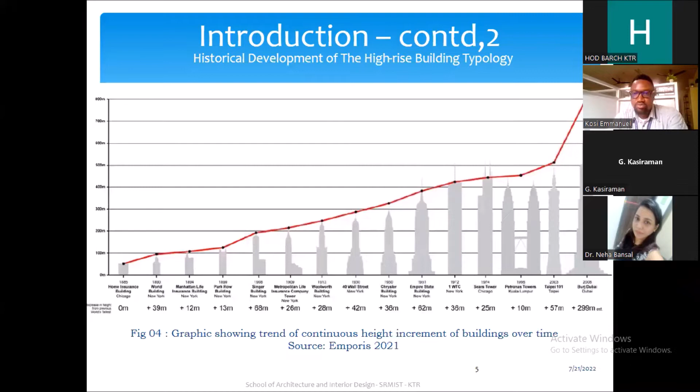This chart or graph shows high-rise buildings starting from 1885, the Home Insurance Building in Chicago, and traces the increase in height of high-rise buildings over the years. I've mentioned the names of the buildings and their heights, tracing this progress from the Home Insurance Building in Chicago up to the Burj Khalifa in Dubai.

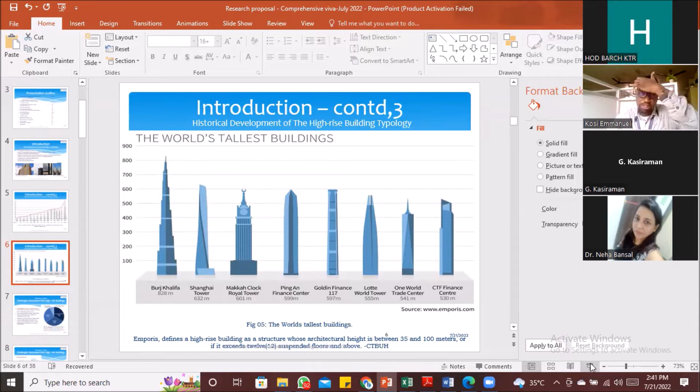So that's also what we're trying to show here. One important thing at this point is to identify the definition of a high-rise building by CTBUH, the World Authority on High-Rise Buildings, the Council on Tall Buildings and Urban Habitat. They have defined a high-rise building as a structure whose architectural height is between 35 and 100 meters, or if it exceeds 12 suspended floors, it can be regarded as a high-rise building.

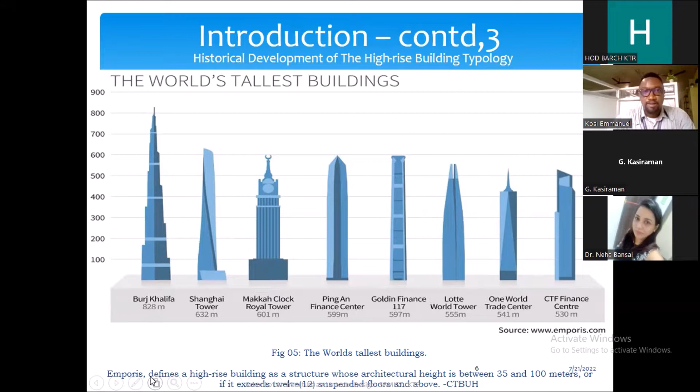So now I've mentioned the history of high-rise buildings and talked about the benefits. Now I'm also trying to highlight the challenges associated with this building typology.

With increase in height, tall buildings become more resource intensive due to the excessive scale and complexity required to achieve them. Heavy energy and heat supply is required. You also have to worry about unstable wind pressures, and rely on technology to fight fire at such altitudes.

Also, the problem of vertical transportation: you have to make sure you have steady power supply, otherwise you cannot travel to upper floors without lifts. If there is no power, the lifts won't work, and if the lifts don't work, you have a building which is non-functional. This also goes for water supply—pumping water from ground level to higher levels needs a lot of energy and specialized technology.

Again, it requires highly skilled consultants and contractors to design and build, because any wrong design strategy can lead to increased energy consumption.

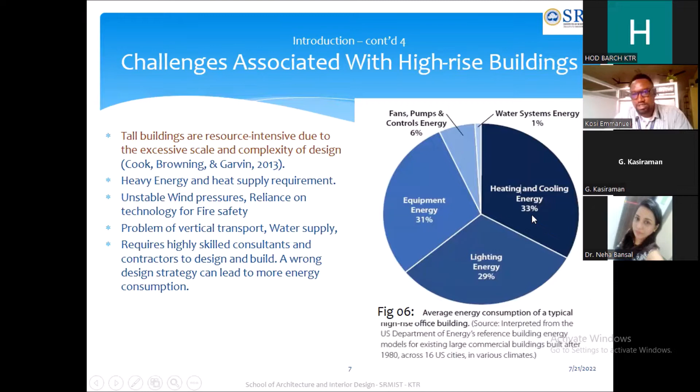I've included this pie chart interpreted from the United States Department of Energy reference building, identifying in percentages the different aspects of energy consumed in high-rise buildings. We can see that the highest energy-consuming feature is heating and cooling energy, at 33%. This points to the fact that heating and cooling, which we also call HVAC, is a critical area for high-rise buildings, and one of the challenges these buildings currently face.

This report by the United Nations, in a more global sense, highlights that buildings generally—whether high-rise, low-rise, or medium-rise—consume 36% of natural resources and energy. This means the construction and operation of buildings consume 36% of world energy consumption and generate 39% of the world's greenhouse gas footprint.

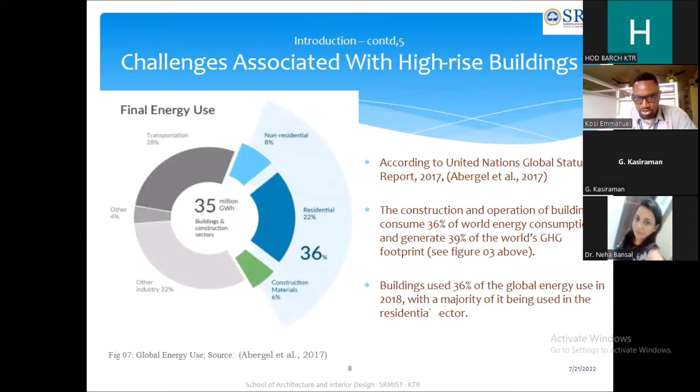We cannot neglect this, because it's important to identify why these buildings consume so much energy. Of course, lots of researchers have worked on this, and there's a move towards reducing the energy consumed by buildings, especially high-rise buildings.

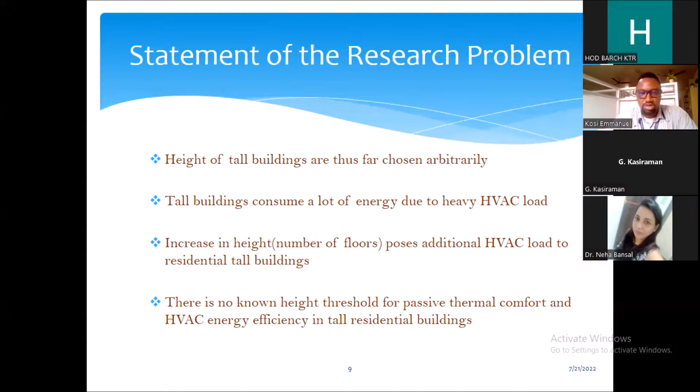In this slide, I state the research problem that this whole topic is trying to address, put as bullet points: the height of tall buildings thus far chosen arbitrarily; tall buildings consume a lot of energy, especially due to HVAC load; the increase in height and number of floors poses additional HVAC load, especially in residential tall buildings; and there is currently no height threshold for passive thermal comfort and HVAC energy efficiency in residential buildings.

So we went into a review of published literature, and a number of researchers have done extensive work in the area of energy efficiency, thermal comfort, and high-rise buildings.

This particular study by the Council on Tall Buildings and Urban Habitat - I'm referring to the picture on the left with red arrows pointing at item number 2. They conducted a study and identified major topics of importance regarding high-rise buildings. The second item on their list was the need to research and determine the optimum height, density, and massing of tall buildings in order to provide appropriate social interaction and communities at an urban city scale. This work by the CTBUH identified this as a gap which needs to be studied and researched.

To the right, you can find that researchers at University College London in 2017 also did some work where they took high-rise buildings and analyzed the energy consumption. The high-rise buildings they took, by the way, were commercial office high-rise buildings. They came up with the conclusion that beyond a certain height, buildings begin to become energy inefficient - it's not efficient to build beyond that height.

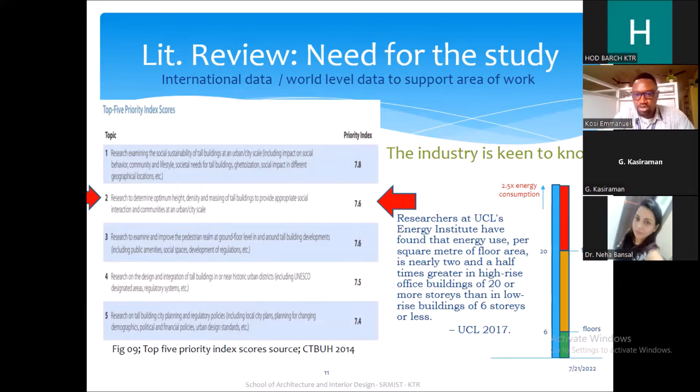Now we go forward to look at the definition of the key concepts we are talking about, which include energy efficiency, thermal comfort, and building height. Simply put, energy efficiency means using less energy to get the same job done, and in the process cutting energy bills and reducing pollution. In this case, we are focusing on energy consumed specifically by heating, ventilation, and air conditioning.

So we're talking about thermal comfort. Thermal comfort is defined as the condition of human mind that expresses satisfaction with the thermal environment and is assessed by subjective evaluation. Building height refers to the vertical distance from the grade level at the main entrance to the top of the parapet that comprises the majority of the building for a flat roof. So basically what we are looking at is three things: energy consumed by HVAC, and the thermal comfort of the individuals who are in these buildings at different altitudes.

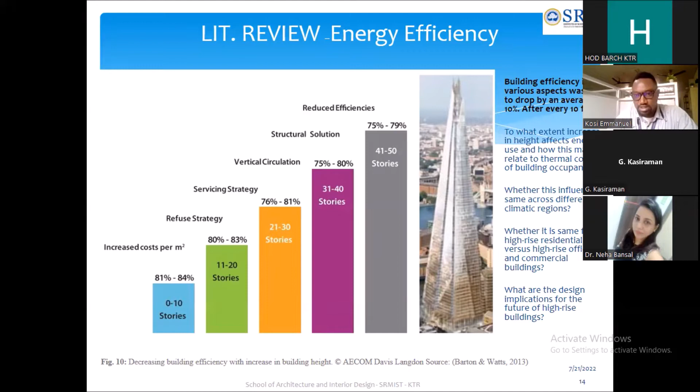Moving on to the next part, where I highlighted the work by the popular patron of bioclimatic design concepts, Ken Yeang. The principle of bioclimatism simply means design aiming at the construction of buildings that are in harmony with the natural surroundings and the local climate, ensuring satisfactory conditions of thermal comfort inside. Ken Yeang, over the course of his practice and academic pursuit, has written lots of books and articles on this principle, and has done many real-life built tall buildings where he tried out this concept.

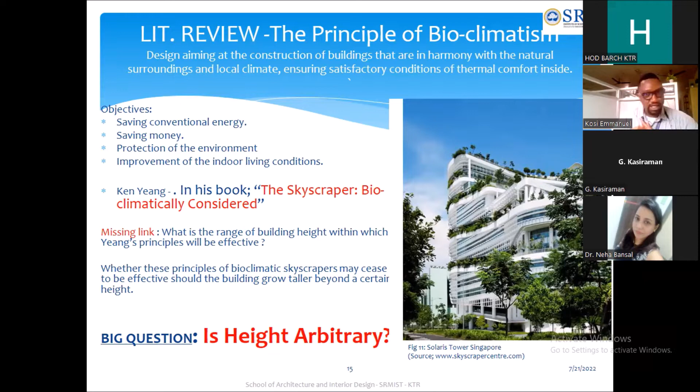This immediately raises another question: if it is possible to design high-rise buildings to adopt the bioclimatic concept, is this true at any height at all? Or at some height does it become impossible to have a bioclimatic skyscraper? This is a missing link identified from this particular study.

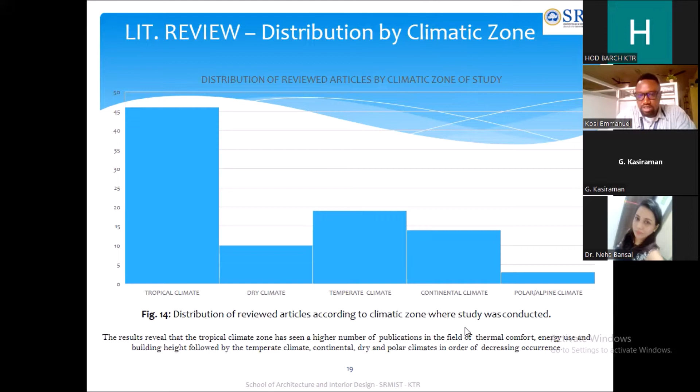I also made this chart to show the distribution of articles studied according to the climatic zone where the tall buildings studied were situated. We find that tropical climate has seen the most studies in this regard. The results reveal that tropical climate has seen a higher number of publications in the field of thermal comfort, energy use, and building height, followed by temperate climate and continental dry climate, as we can see, making it easy to understand what is going on in research in this area.

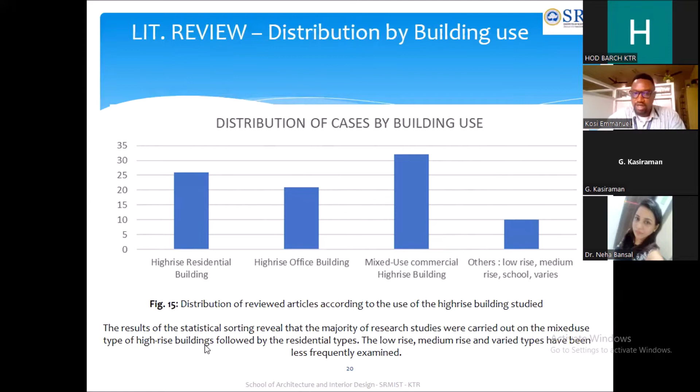We also prepared this distribution by type of use. I mentioned earlier that it's important to know whether the influence of height differs for residential, commercial, and office buildings. From the articles reviewed, the results of the statistical study revealed that majority of research studies were carried out on mixed-use type high-rise buildings. This is also important for us to know what other researchers are doing in this field.

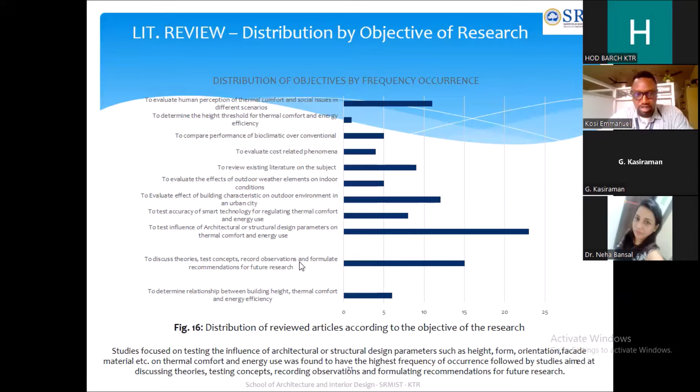This shows the distribution according to the objective of the research, why those authors carried out their studies. Studies focused on testing the influence of architectural or structural design parameters such as height, form, orientation, facade material, etc. on thermal comfort and energy use were found to have the highest frequency of occurrence, as we can see from this chart. More work had been done in the area where the objective was to test the influence of architectural design parameters, including height, on energy and thermal comfort of high-rise buildings.

In summary, we identified some gaps in the literature study: there is no definite height threshold for energy efficiency in residential high-rise buildings; there is no knowledge on the nature of the influence of height on thermal comfort in high-rise residential buildings; there is no knowledge on the comparison of HVAC energy performance between residential and commercial high-rise buildings, meaning we don't know whether residential high-rise buildings consume more HVAC load than commercial ones; there is paucity of research on tall buildings from Africa; and finally, there's no knowledge on the relationship between building use and thermal comfort.

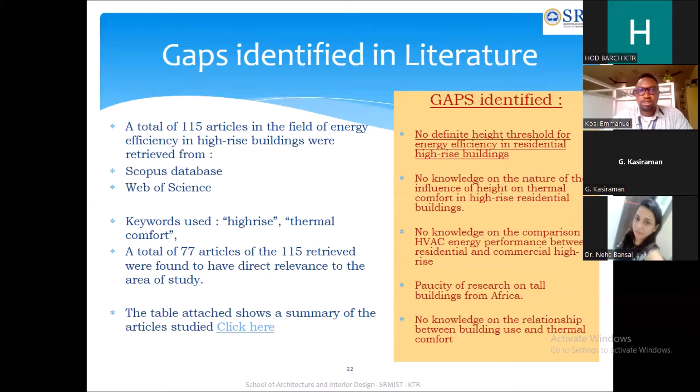This brought us to the aim and objective of this study, which is to evaluate the relationship between three elements: building height, passive thermal comfort, and HVAC energy consumption, specifically for residential high-rise buildings. This is with a view to ascertain, in empirical terms, the optimal height or optimal height threshold for HVAC energy efficiency and passive thermal comfort in high-rise buildings.

So what this means is that we're trying to study three variables: building height, passive thermal comfort, and HVAC consumption, low energy consumption. We're trying to find if there is a relationship between these three, and if so, what is that relationship in empirical terms. That is the aim of this study.

The research questions that this study will answer, when completed, we identified four main research questions. The first: we want to find out if there is a significant relationship between the building height, meaning the altitude, the floor level, and the energy consumed by HVAC equipment in residential high-rise buildings. We want to find out if there is any relationship at all.

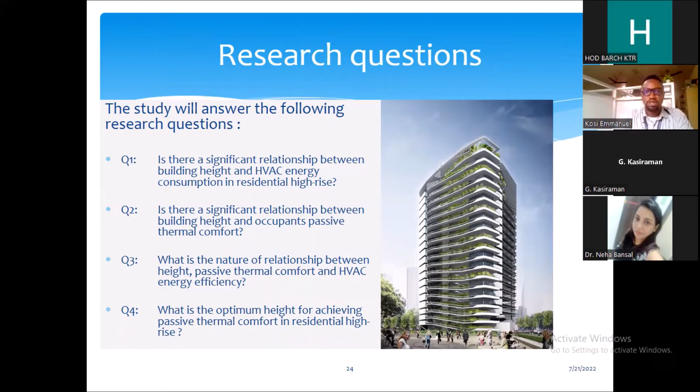Thirdly, we want to know what is the nature of this relationship, if it exists. Fourthly, once we answer these three questions, we will be able to find out if there is a range of floor levels within which it is optimal to maintain low energy consumption and passive thermal comfort. So these are the questions which this research intends to answer.

To answer that, using the alternative hypothesis method, we have come up with four intelligent guesses which will be subjected to testing, adoption, or rejection. For the first question, we suggest there could be such a relationship. For the second, yes, there could also be such a relationship. For the third, we also think there is such a relationship between these three elements.

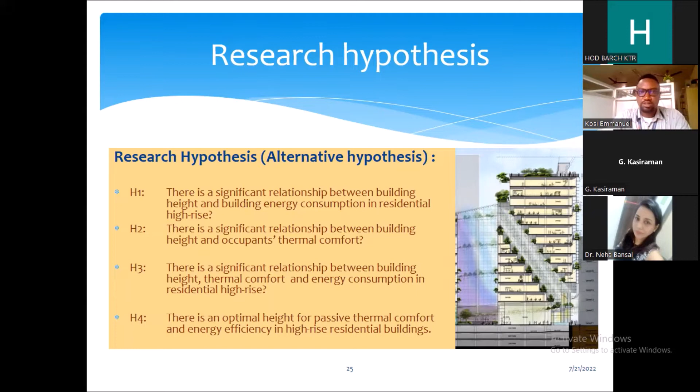For the fourth question, we guess that there must be an optimal height range within which, if you maintain that height rather than designing your building to any arbitrary height, you can achieve passive thermal comfort while using minimal energy consumption. So these are four intelligent guesses to answer the four questions, and they will be either accepted or rejected at the end of the study.

For the method we intend to use, it's basically fieldwork data collection. We're going to use a formula to arrive at the number of buildings we'll study, then visit those buildings and take measurements on ground for calculating thermal comfort.

As for the occupants' thermal sensation, how they think they feel in the buildings, we're going to issue a structured questionnaire to capture that. For reliability of the instruments used, we're going to use the test-retest method and Cronbach's alpha to establish the coefficient of reliability of their responses, ensuring they don't respond due to bias or due to some physiological or psychological imbalance at the moment.

As for the energy consumption due to HVAC, we're going to try to abstract that from the energy bill data, requesting it for different apartments at different levels. We'll use mathematics to abstract exactly what amount of consumed energy was due to the HVAC, air conditioners, and so on. Once we have this data in tables, we're going to simulate.

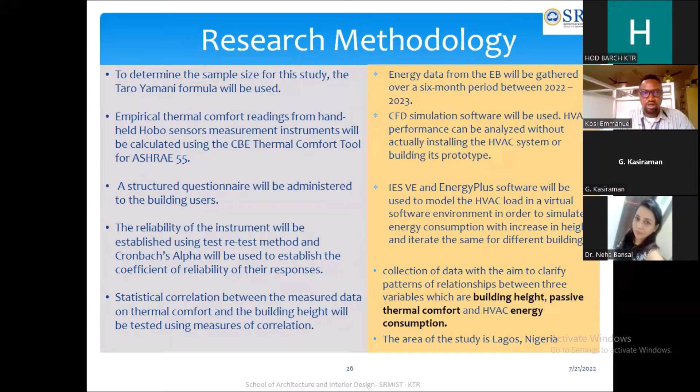So at the end of this, we are trying to collect data with the aim to clarify the patterns of relationship between the three variables: floor level, passive thermal comfort at different floor levels, and energy consumed by HVAC at different floor levels. The area identified for this study is Lagos, Nigeria, which is my home country.

As justification for the choice of research methodology, we mentioned that CFD and IES VE simulation is the industry standard for simulating HVAC performance in yet-to-be-built spaces. Many researchers have used CFD simulation, and there is a lot of work stating that this is the method they used and they arrived at reliable results.

As for why we are using EB, energy data collected by the Municipal Electricity Board is the most reliable because it's the government authority that issues, measures, calculates and collects energy bills. So whatever data they provide for this study at the different levels will be very reliable. That is why we have chosen them.

For the thermal comfort calculation, there is a wonderful tool developed by CBE, University of Berkeley. The screenshot shows an interface of the software. All you have to do is grab the real life measurements, and once you put it into this software, it gives you the thermal comfort at every level.

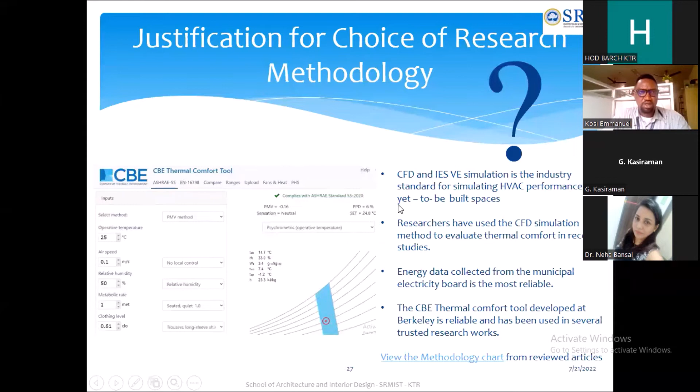As for the research process we're going to use, I mentioned that we're going to be doing a lot of field data collection, but before that we have to identify the instruments that will be used, which have been identified, and we have to test and validate them before we hit the field.

Once we are in the field, we grab the measurements and issue the structured questionnaire, and also get hold of whatever secondary data is available.

Once we come back from the field, we put this down in tabular format, and then we try to iterate using software to see what happens in cases where we go higher. We'll try to iterate the different values, present this in tabular format, and perform statistical analysis. Then we will be able to accept or reject the hypothesis.

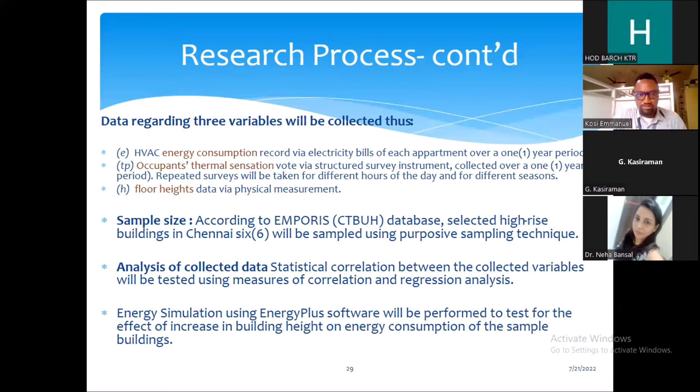This also mentions the three elements we are talking about, which include HVAC energy consumption, the occupants' thermal sensation vote, and the floor levels or floor heights. This is the list of experiments which will be performed.

We're going to use the Taro-Yamane formula to arrive at the sample size, and then use a structured questionnaire to grab the occupants' thermal sensation vote. Then we're going to use the Hobo sensor equipment, HD32.3 instrument, to grab the four parameters which make up thermal comfort: air temperature, relative humidity, air speed, and mean radiant temperature.

Once those are captured, we're going to use the CBE thermal comfort calculator developed in Berkeley to calculate and arrive at the thermal comfort for the different levels. We're also going to use CFD simulation and the Energy Plus software. Once that is done, to analyze the results and come up with significant relationships, correlations, or regressional analysis, we're going to employ the statistical package SPSS. Then to present our finished work, we're going to use Excel, PowerPoint, and Word.

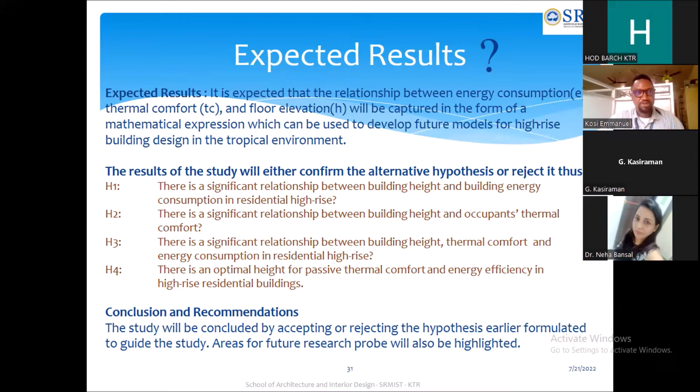At the end of this study, it is expected that we will find, one, whether there is any relationship at all within these three variables, and if so, whether it can be expressed in a mathematical formula. If so, it is expected that this relationship, once captured in mathematical form, can be applied for various uses, like future designers or architects determining whether they want to go to 100 floors or 200 floors. It will no longer be arbitrary; it will be guided by some mathematical expression between energy consumed due to HVAC, floor level, and thermal comfort. If such a relationship exists, we're going to find out.

As for research and publication ethics, we touched on what is acceptable and what is wrong when it comes to research and publication. As for the internal courses in the department, I took 4 courses, including facade technologies, green building strategies, performance evaluation tools, and new age materials and methods.

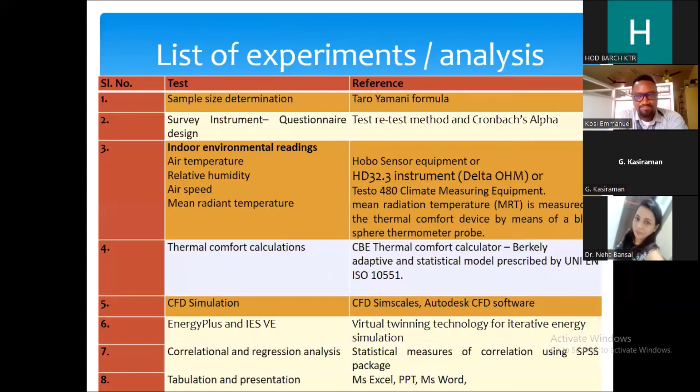Okay, Mr. Emmanuel. Yes, sir. I like your presentation, very systematic and well-organized. Thank you very much, sir. Within a year I think you've published 2 papers also, it's really a remarkable one. Thank you very much, sir.

Good work. So, in many of the literature they talk about building height, the relation between height and energy efficiency, passive design techniques, everything already they talk about. What is the novelty in your project? This was already discussed in many of the literature.

Hello? Yes sir, I'm with you. Your audio is a little wavy, I didn't get your question. Can you hear me now? Yes, I can hear you now, sir. Many of the literature already discussed height, energy efficiency, and passive design techniques. So are you only repeating, what is the novelty in that?

The novelty in this research proposal is that as of now, the academia does not know for sure what is the optimal height. As it stands, high-rise buildings are done arbitrarily — if you have more money you can go to 1,000 floors, if I have less money I can do only 10 floors. There is no known scientific range of height that is optimal for maintaining passive thermal comfort and low energy consumption. If this study finds that out, it will be very new and wonderful information, because it will guide future designers regarding height decisions.

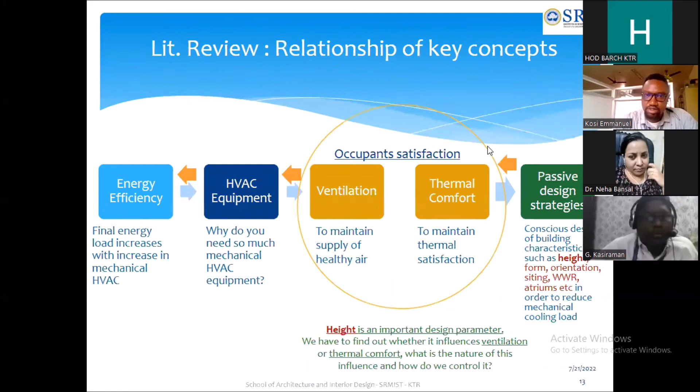Very nice. This one, the Journal of the International Society for Study of Vernacular Settlements, is Scopus Index since 2016. Is it unpaid or paid journal? It is paid, sir. It is paid.

Yes ma'am, audible? Yes ma'am. Okay, first of all I appreciate the amount of work you carried out within a year. And what I felt is your focus is missing, okay?

Like you started with the range of building heights within which Ken Yeang's principles will be effective, okay? So that was your focus. But like sir said, there are a lot of studies which have been done on the relationship of building height and energy consumption, okay? What is your contribution in this area of research? Your focus, you said initially...

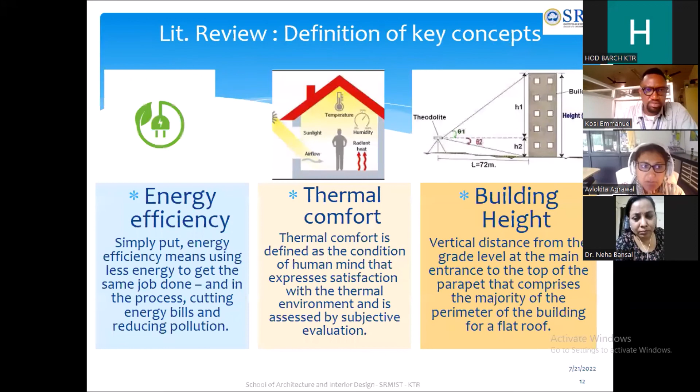Okay, for determining the thermal comfort, ma'am, I'm using two methods. I'm going to collect actual weather information from this building, indoor environmental data. Yes, right? Indoor data regarding air temperature, air speed, relative humidity, and mean radiant temperature. Absolutely, I'm going to collect that.

Yes, and then you will check whether it falls within the thermal comfort range or not, whether you go for adaptive or the fixed predicted model. Whatever it is, you will get whether this given set of conditions fall within thermal comfort or not. But is thermal comfort dependent only on the height? Or are there so many other parameters which are also varying, like the building envelope?